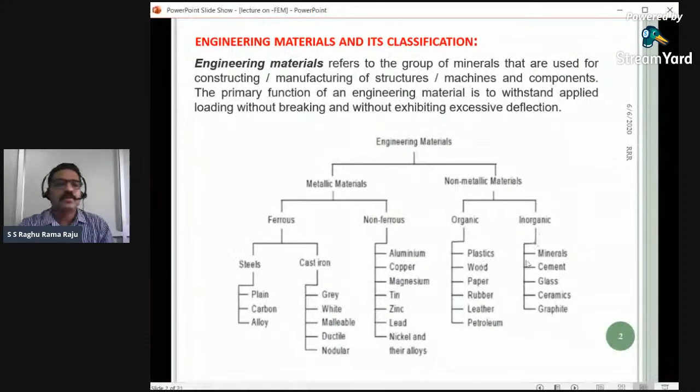I am more interested in getting more knowledge on this type of properties, because at the end of the day, we engineers always talk about how suitable the properties are. If you see mechanical properties in their entirety, these are the main properties generally useful for any field, either construction, machine, mechanical or chemical - anywhere in the universe we can talk about these mechanical properties mainly.

Some few other examples are there, but they will not have much importance. This is the overall properties of any material. Let me read quickly: strength, elasticity, stiffness, flexibility, plasticity, ductility, malleability, toughness, resilience, hardness, brittleness, creep, fatigue, and machinability.

Everybody has heard of these material properties, but we get more interesting results when we know the exact meaning of each word. That was the main important point. I will concentrate always on this type of lecture, because I wanted to give a few examples.

Once we ask what an engineer is - I am basically from the industrial background - what does the industry expect from those graduating from educational institutes? They should have some concepts and skills right from the engineering that they learn.

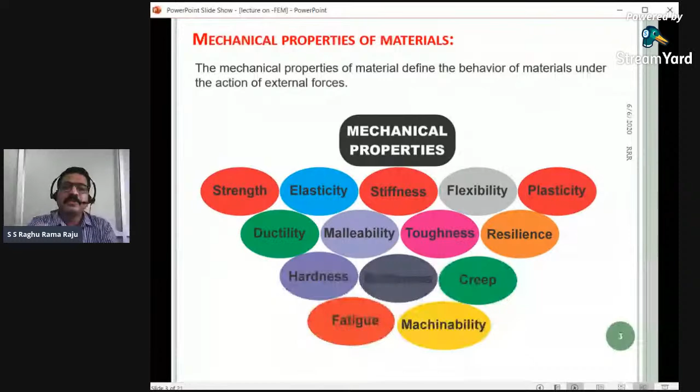Let's see. First, I would like to give the definition of strength. As I said, our left brain always takes in definitions or formulas. Everybody knows strength—it is defined as the ability to withstand an external load without failure. But when we talk about strength versus stiffness, there will be a little confusion among students.

That's why we have to properly support the students so that their right brain works properly. If they can see examples and visualization, then obviously their right brain starts working.

So instead of just giving definitions, if you give examples like this—here I've presented a small example so they can visualize what strength is. I've shown glass: it's difficult to bend but easy to break. From this, we can say strength is low and stiffness is high for glass.

Now compare with another example, a spring. What is the property of a spring? It's easy to compress but difficult to break. So comparing strength and stiffness here, strength will be high and stiffness is low. When students see this, they'll understand through visualization what strength and stiffness are, and they'll enjoy the learning more.

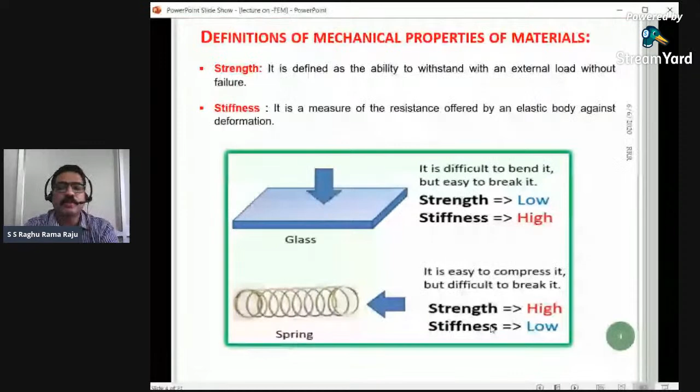That's one property. Now let's look at another property: elasticity. Everybody knows this isn't difficult—it's defined as the ability of a material to return to its original position after removal of loading. In other words, it's the ability to stretch. This everybody knows, no need to explain further.

But if we introduce another property, flexibility, and ask students to compare, their right brain starts working again. That's why we have to compare them side by side so the right brain keeps visualizing. Strain taking place within the elastic limit is known as flexibility, or the ability to bend. So elasticity is the ability to stretch, flexibility is the ability to bend—that's the difference between them.

So what I mean is, if you give proper examples, their right brain keeps working, which helps them gain visualization. At the end of the day, engineering is nothing but visualization. Now let's proceed further.

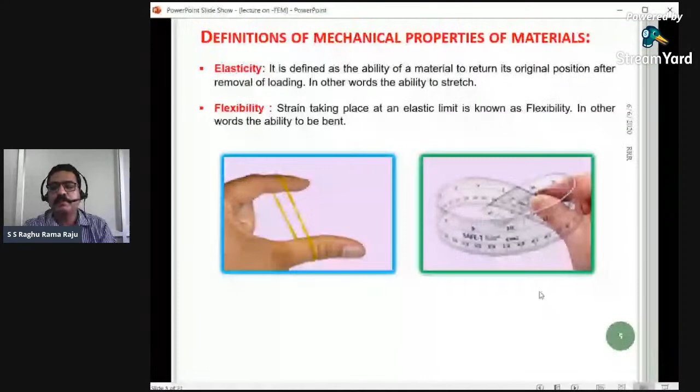Next is ductility—also a very important property of materials, especially seen in engineering applications where we use terms like ductility and brittleness often. But comparing them side by side gives more understanding. As shown here, ductility is defined as the ability of a material to be pulled into a thin wire or band. Next is brittleness.

The material is said to be brittle if it fails without any plastic deformation. That's the definition you can get anywhere. But our duty is to explain to students in such a way that their right brain should work.

If you see here by examples, by showing some sketches, they can see in the first case a body is there and we apply a force, a tension force, whatever it may be. Now if you see condition A, figure A, it failed in a horizontal path suddenly. If we compare to case B, it does not happen suddenly, it elongates something before it fails.

That we call brittle, and that is ductile failure, right? If somebody is confused by seeing this figure, thinking brittle failure is always horizontal - no, that is a wrong assumption. It cannot be only horizontal. It may be horizontal sometimes, but that is not exactly the definition of brittle and ductile. Brittle is nothing but it should fail suddenly. It may be horizontal or it may fail in an inclined way, but the only thing is before failure it should not be able to deform. That is the word, brittle failure.

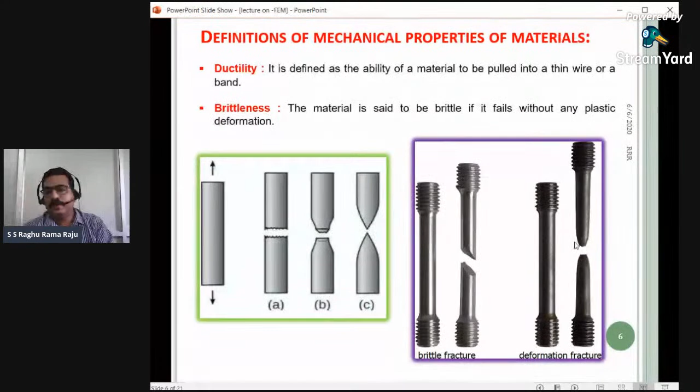But if you compare with ductility, you will see a difference in diameter at the time of failure. Initially it will be big, and at the time of failure it will be a little less diameter. That means it elongated before that failure. That is the word we call ductile.

Okay, next I'll come to toughness and hardness. Here also many students get a little confused. What is toughness? What is the hardness property? So here I can again explain in such a way that they can use their right brain.

Toughness is defined as the ability of a material to absorb enough energy during plastic deformation up to the fracture. Please remember, it is up to the fracture. Once the fracture is over, there is no toughness, we cannot talk about toughness. Up to that failure, as the material tries to bend, we are able to measure how much energy it is able to absorb - we call that toughness.

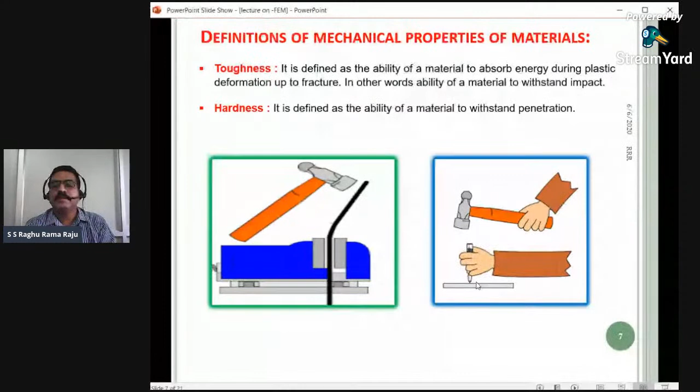Next I think about malleability, resilience, and machinability. What are these properties? We should use our right brain whenever we see these types of definitions - resilience and machinability. I have shown some examples with figures so that our right brain will easily work it out.

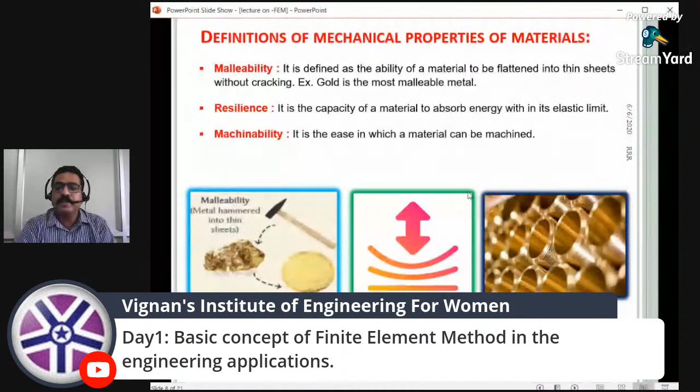Malleability is defined as the ability of a material to be flattened into very thin sheets without cracking. Please remember, without cracking - the thinner we can make it, the more malleability it has. For example, gold - even though it is a solid material, it can be made into very thin sheets or plates. As many of you have seen, some of you use golden saris, right? It's very interesting - if you want to make a sari with gold, you can imagine how thin we have to make it. That possibility is there because gold is a highly malleable metal.

Next, resilience. This is also a very important property, especially used in vibrations and such. It is the capacity of a material to absorb energy within the elastic limit.

Please read carefully the definition. Many students just memorize the definition by heart, but that is of no use. To understand the definition properly, we'll obviously enjoy learning the skills more.

So for elastic limit, suppose there is a pendulum. We give it some energy and it keeps moving. If you apply force like a spring, resilience will happen. But if it's plastic deformation, even if it comes back to original position, we cannot call it resilience. Please remember, this is valid only up to the elastic limit.

Next is machinability. What is machinability? It is nothing but the ability of a material to be molded into a required shape. Otherwise, we cannot use that metal. So if we can easily machine a material, for example make threads or mold it into a particular shape, then this machinability property works out.

Another important example is creep and fatigue. Creep is when a material in service is often exposed to different types of continuous forces, for example temperature. Suppose some machinery is kept outside our store, continuously exposed to the weather. After some years, that function or property of the material will lose its significance. That we call creep.

But please remember, we cannot see this immediately with our naked eye. It will be possible to see only after a huge lifespan. That is creep. Next we'll come to fatigue.

What is fatigue? If you see many machines, mainly mechanical machinery, continuously working, vibrations continuously develop as they keep working. After some stage, the material will lose its property. That we call fatigue.

That is nothing but the continuous loss when a body is subjected to continuous loading or cyclic loading. At the end of a few years, that required property will be lost. That we call fatigue.

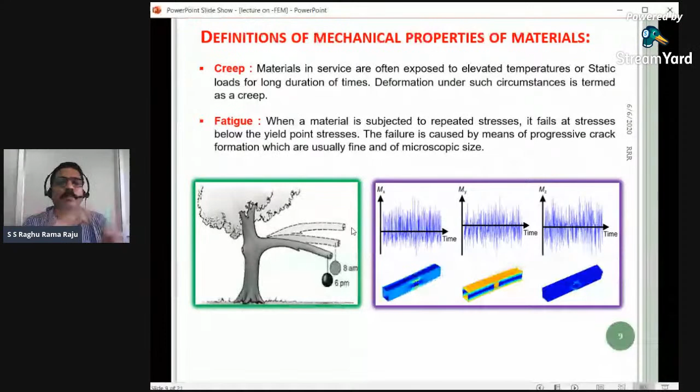So these were the major properties we have to learn and understand with basic definitions. Whenever we say toughness or other properties, we should use our right brain, then we can do the problems easily. That was the main concept I'm explaining here regarding the use of this. The same theory can be applied with students, and obviously they will enjoy the learning.

Next I will come to the actual applications of this material. These materials, end of the day, we have to apply somewhere. We know in entire engineering, it is all about application. Without applications, there is no engineering at all. There are a lot of engineering fields, and everywhere we use this material. So there is a very significant use of these materials. Every engineer should have a basic idea of engineering materials, irrespective of civil, mechanical, or chemical engineering.

Based on that, I think this FDP course conducted by the organizers, Vignan, will be useful to you at the end of all 4-5 lectures of this series. Tomorrow, maybe some more experts will give more ideas about these materials and explain the new techniques as well.

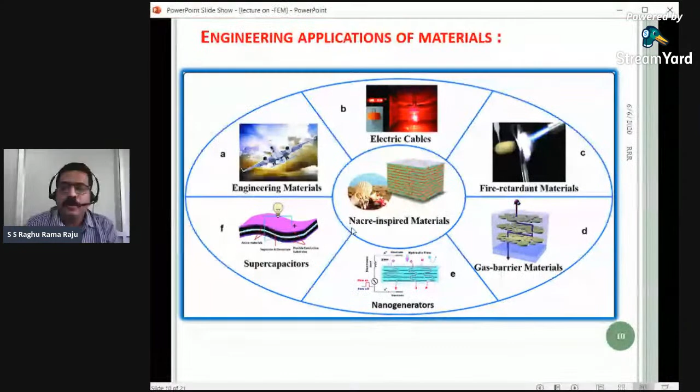For today's session, I've given the basic introduction of materials, their properties, and applications in different fields. I took finite element method as one example application, so I'll continue about this for another half hour. It's indirectly related to material only, but without material, we cannot go for the application.

So let's come back to the basic thing. We are all engineers, whether we've done BTech, MTech, or PhD. Even if you go into industry or teaching profession, basically we are all engineers. So first, students should know what engineering is. But if you see, many students, even after passing out, if somebody asks what is engineering, they will be blank. They have no idea what they learned.

As a teacher, we have to give them a definition of engineering. So here I have defined it practically: engineering is a scientific understanding of the natural world, using it to invent, design, and build things to solve problems and achieve practical goals. So at the end of the day, we have to solve practical problems. That is the role of the engineer.

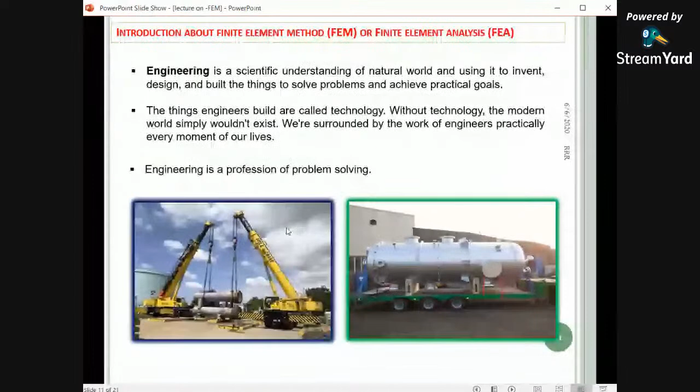I think I am deviating from the subject, so let me go back to the regular topic of finite element method. Once we understand engineering, what engineering is, we can go further in this field. Here I have shared some general figures so that our right brain should work. If we simply give definitions, only our left brain works and there is no use. So my lectures and teaching will always encourage students to use their right brain.

I will explain what engineering is through an example. If you see here in this screen, there is a crane arrangement, and there is some weight or pipes that they are lifting. But where is engineering being used here, can any mathematician work on this? I would say absolutely no.

Here we use our engineering knowledge to work out this practical problem. The problem is we have to lift the pipe, and at the end of the day, that is the final goal. Engineers, what they will do is, if you are not an engineer, you can lift from anywhere, that is possible. But if you do that, rotation will take place and it will create additional moment including this weight, creating unnecessary additional moment that makes the job tough. That's where engineering comes in.

So engineers will think, okay, this material is there, we have to lift it in a proper way such that we cannot get additional moment or additional load while lifting. What engineers will do is find the centroid location or center of gravity of that material, so that from there we can easily lift it without creating any rotational or additional moment for this application. That's what the engineering field is.

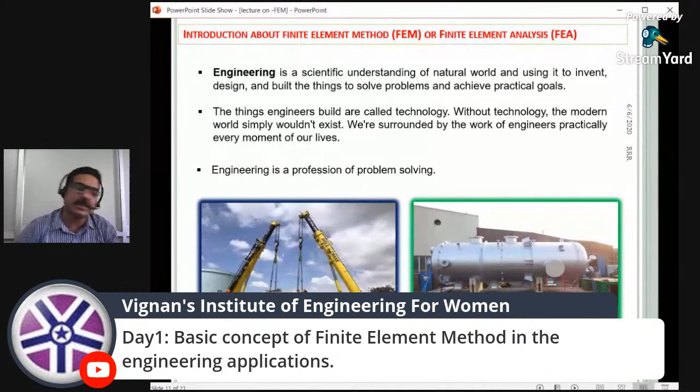This is just one example. If you come to another picture, there is a cylinder, well I cannot just call it a cylinder, it is actually a pressure vessel, though obviously the shape is cylindrical. A non-technical person or non-engineer will always just call it a cylinder. But we know it is a cylinder shape, but there is a particular name, pressure vessel. We read all this in our studies. Here also we see different components in this one cylinder, but we know as engineers that each material component in the cylinder has a particular use. That's what engineering does.

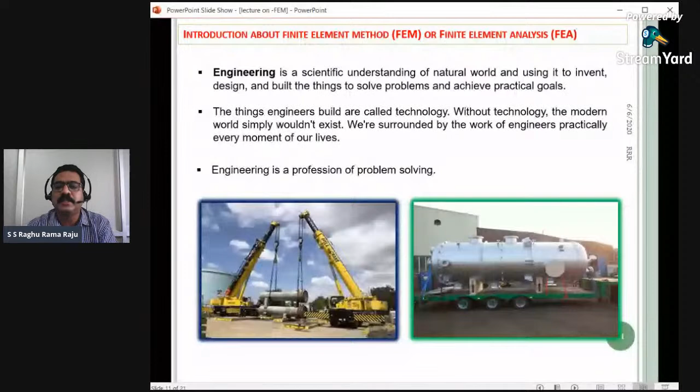So how can we solve this problem, like finding the stresses, or finding the material, I am going to take this up in a few future lectures. So here again, I'll come back exactly to the topic of the finite element method.

Before going to finite element method, we should know that as engineers, we always solve practical problems. For practical problems, there are many ways to solve them. There are majorly three types of problem solving approaches: one is the analytical method, also simply called hand calculations. Next is numerical techniques, and the third is the experimental method, also called physical testing. So if you want to solve any problem in this universe, one of these methods should be applied. But as I said, just stating definitions, our right brain should not just do that work.

I wanted to give a little work to the right brain. So let me define more accurately what the analytical method is, taking a small example. Suppose there is a family with 4 persons having different age groups: 1 year, 2 years, one is 27, and one is 30 years. My task is to find the average age of all four.

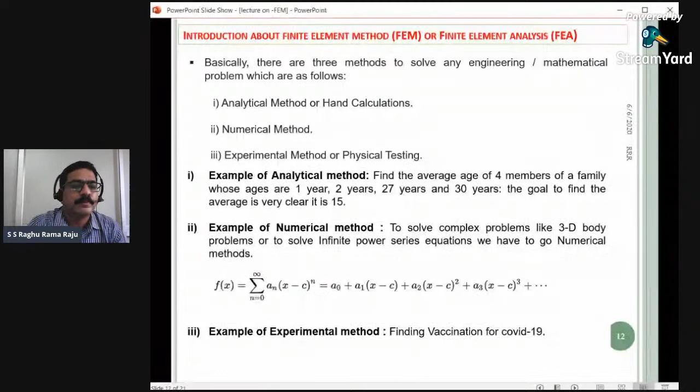But in my next lecture, I will focus only on the analytical method. Now we have an overall idea of this entire topic: any problem in this world can be solved by one of these methods, and based on the complexity of the problem, we can choose the appropriate method. Now I just want to do a little comparison between analytical versus numerical analysis.

So here, let's take one small mathematical equation: find the minimum of y equals x squared minus 3x plus 2. This is one problem, it may be a mathematical or engineering problem. Whatever type of problem it is, our goal is to solve it. Since this is a simple problem, we can solve it simply by the analytical method — this is possible in this case.

But suppose the same problem needed to be done differently — what I am going to tell you in the next slides is about the finite element method. As I said, this was the analytical method. How is the analytical problem solved in the simple equation? What we have to do is take fine divisions for every region — that is what the finite element method and the numerical method is.

So the range is x equal to 1 to 2, y equal to 0. So x range is 1 to 2. Again, divide that equation into a number of parts, that is every 0.2 increment. But please remember, our problem equation is such that we will get the answer between 1.4 and 1.6 - that is the final answer.

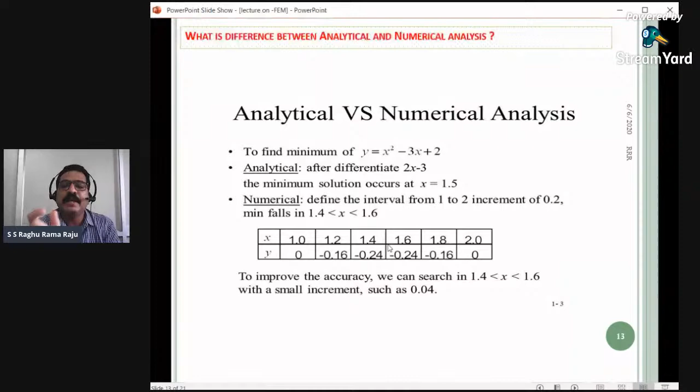We know that we are getting a value of minus 0.24 in this case, suppose. But we know that it is between 1.4 and 1.6. But since this is taken as the interval of 0.2, we are getting this value. But if you refine this problem further, we will get a more accurate result.

So that I will tell you - in this practical problem, you cannot visualize this much from your right brain, but I will explain with one more example in the next slide. Then you can get more understanding of what is the finite element method and what is the advantage of this meshing. We'll see that, and I can give more explanation on the numerical method.

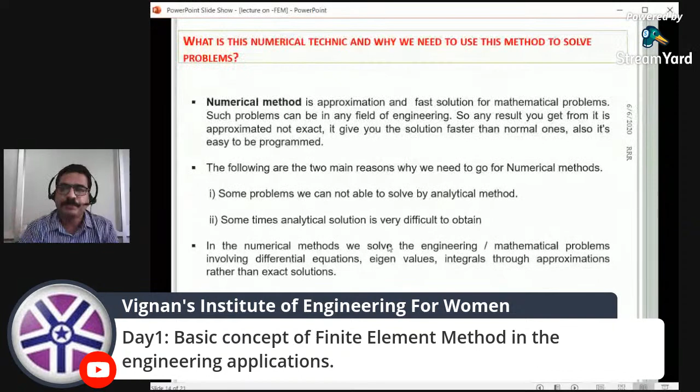As we know, this is an approximation and a fast solution for mathematical problems - that is the goal of a numerical method, because we cannot solve this problem by the normal analytical approach. We have to go for the numerical method, but we get a quick way. Again, please remember, this is not the exact method. But since there is no other option for us to find the solution, we go for this numerical method. At the same time, we can get a more accurate result in this numerical method also.

If not equal to the final exact value, we can nearly approach it using the numerical method with different techniques. That is what we call in the finite element method the fine mesh technique. In fine mesh techniques, as I discussed in the earlier slide, we will define more refinement. Obviously we can approach very near to that point, and then we will get a more realistic solution rather than a broad one. Let's see that in another slide.

So please remember, some people have a little confusion between FEM and FEA. Obviously the meaning is the same - finite element method is nothing but finite element analysis, because at the end of the day we are doing the analysis.

So again, when I say analysis, students should use their right brain. What is the analysis? Instead of simply saying analysis, there is no use - what does analysis mean? Suppose any body has some external load acting on it, obviously it will respond. Response means in the form of deformation, stress, strain, anything. So this response will happen. But we cannot visualize all the responses of a body due to the external loading. So our target is to check how this body is responding due to the applied loading.

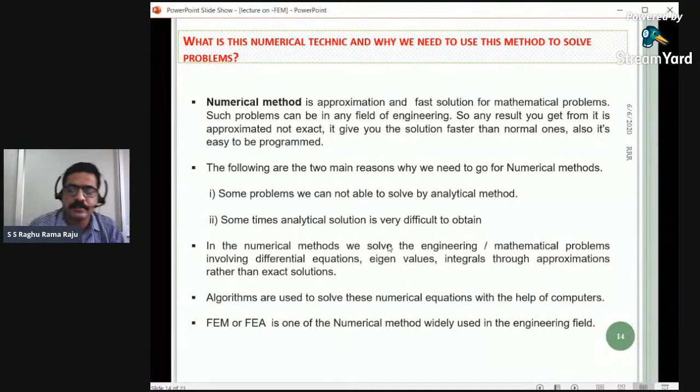Again, if you go to the history of the finite element method, when it started and when engineers invented this technique, I can just give a presentation here. Just a few words, nothing new. Everybody knows this - the finite element method was generally used in the 60s, mostly in the aircraft industry, because that was the first application using this technique, in the 1960s.

The aircraft industry mostly used this finite element method, but later it became useful everywhere - in all fields, even in medicine nowadays we are using this. I can say the finite element approach is used very effectively. So it is always a great future if all engineers have a good understanding of the finite element method.

Okay, so the first finite element method used here is in stress and plane stress analysis. Now, when we say plane stress, students again get confused on what exactly plane stress means, why we call it stress.

I already said stress is nothing but the forces developed internally in the material due to external loading. We cannot visualize directly with our naked eye what is the behavior inside the body. That's why we use finite element method. The computer solves the problem and we can see the effect of stresses in the form of a sketch. That's what we normally do in finite element method. We only see stress diagrams, not exactly the behavior, but we call it the behavior.

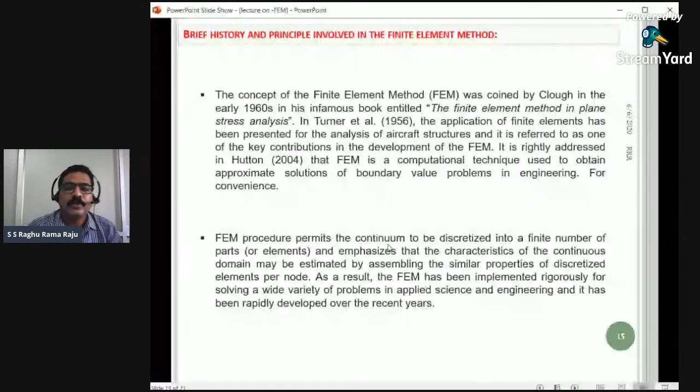Okay, proceeding further. The most important thing in finite element method is discretization. When we say discretization, students new to this subject could get confused about what it means. It's our duty as a teacher to explain more, to help them use their right brain. So I define discretization simply as dividing the entire domain into a number of smaller parts. Saying it this way, they will remember discretization and use their right brain.

I already discussed there are different ways to discretize any element, problem, or body. If you want more refined and more exact results, the elements should be as small in size as possible. But at the same time, we cannot do very micro sizes in finite element method.

As we use finite element method, the more we reduce the meshing size, the more problem complications we give to the system. It has to create that many more elemental stiffness matrices, which requires more space in the computer. So if you give very fine refinement, the computer will basically sleep - it won't wake up for hours.

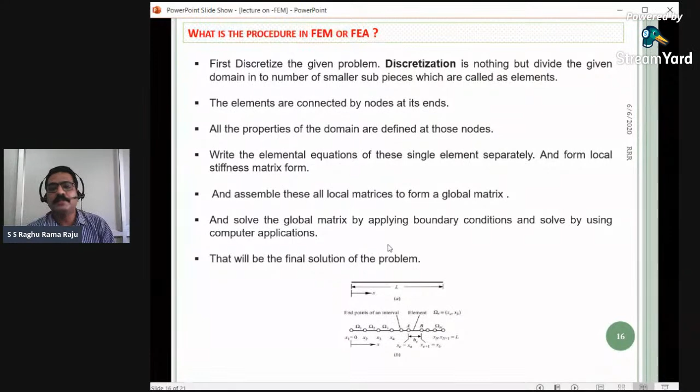With this, next I will explain, after discretization, how discretization takes place in a finite element method.

Finite element method can be applied to any dimensional body, either 1D, 2D, or 3D. We can do any, but if you try to calculate 3D figures manually, it becomes very difficult. That's why we use algorithms and computer programming to solve 3D problems. But simple 1D and 2D problems we can do manually if you know the exact concept of what finite element method does. I'm not going to teach all the complicated things now - my presentation here is just an overall idea of finite element method, which will be useful for further study. Other experts may give more in coming classes on this method for other applications, where you can learn more.

As presented here, there are three types of elements used in finite element method: 1D, 2D, or 3D. Generally, when we use 2D, it is the plane stress problem. Again, we should understand what the plane stress problem is. Plane stress problem is nothing but what we can visualize within a screen - suppose we are seeing the screen, it is the plane stress problem because the thickness we cannot visualize, it will be in the opposite direction.

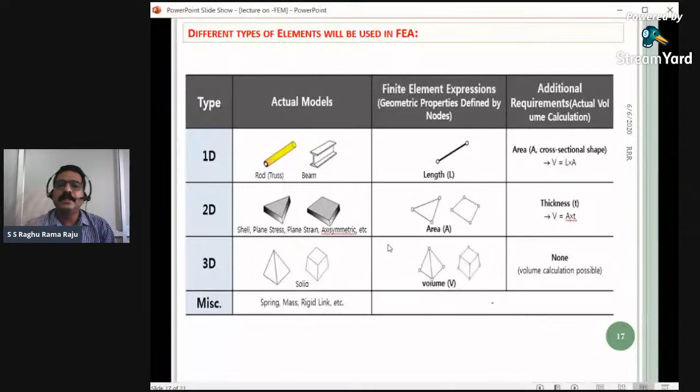If we really require very accurate results, we have to go for the 3D dimensional problems, that is 3D meshing. Here I will give an overall idea of what the results will be if you use the refinement of meshing. That is what I'm concentrating on at this topic now.

So here, see, there is one body. We have applied different external loading, and now we want to find some stresses, that is the response of the structure of this material, using the finite element method. That is the overall concept presented here. The loading is constant, please remember, loading is constant, material size is the same, and its properties are the same. But only change here is we are taking the same problem and solving it with three different meshes.

So in the first case we have used the finite element size as 30 mm for each element. Second case I am using 25 mm, and the next case I am using 10 mm of that element size. So the force is not changing, the loading is the same, the area is the same, all properties are the same.

But if you see the result here, we get three different results after doing the analysis in FEM. If you use the 30 mm mesh size, we are getting 1.048, whatever the units may be. Next, if you use 25 mm, we get 0.93 of that particular stress value. And if we reduce further to 10 mm mesh size, we get 0.73.

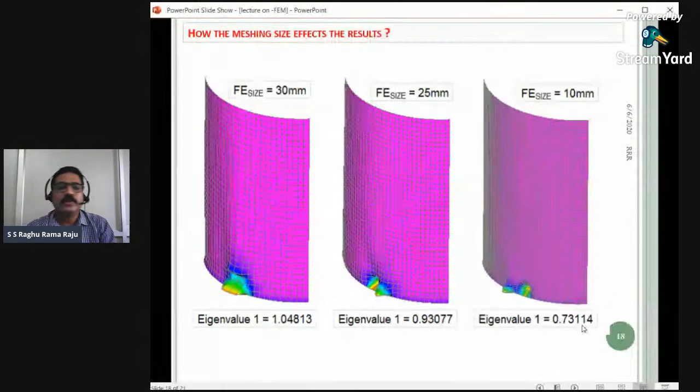So you see we are having different results, but at the end of the day we are not changing anything. The original material is the same, the loading is the same, but we used three different mesh levels. Students can understand why this is happening, otherwise there is no finite element understanding. So I will give more clarity on how the finite element is able to get these different values. I will explain more in my next slide, so that our right brain will work more efficiently for visualization.

So I have taken a small example of how finite element gives stress results based on the meshing. This is a simple example without complicating things. I have taken one small planar element, considering this as a plane, and I want to know, at one point, what stress I am getting due to a particular loading.

For this, what the finite element will do is calculate all the forces and stresses at all the nodes, whether it's 4 nodes or 8 nodes, whatever type of element. It will always take the nodes as the reference, that is the main concept of the finite element. It will not bother about the inside portion, only the nodes, since the software is developed such that nodes are the main criteria.

So what the software will do in this example is, suppose I am getting stresses at all 4 nodes as 5 units, 25 units at this node, 25 units here, and 45 units here. What the software does is average these 4 nodes and present it at nearly the center of some area. It will not take a point, it will take some region. Always the stress will be shown not at a point, please remember, in finite element it will always show some region.

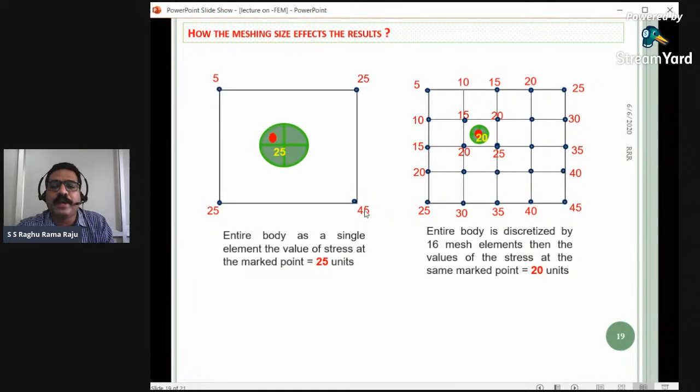So in this region, what is calculated by the software, using this mesh size, if you do the average of all 4 nodes: 5 plus 25 plus 25 plus 45 divided by 4, we will get 25.

The value at the point is 25. Suppose I wanted a more precise value. In some cases we require more precise results, some instruments require more exact stress, not just the average stress. In that case, we have to make a much smaller mesh for that body.

So I've taken the same example, but further divided it into a 4 by 4 mesh, that is 16 small parts of the same body. In that case, the software will do the same thing again, it will try to calculate the forces at every node, so stress or force at every node.

The software already knows the first and last node values are 5 and 25, and it will proportionally distribute the values to the other connected nodes. So since it goes from 5 to 25, the equal proportions will be 10, 15, 20 in this direction, and again in this direction the proportions will be 5, 10, 15 and 20.